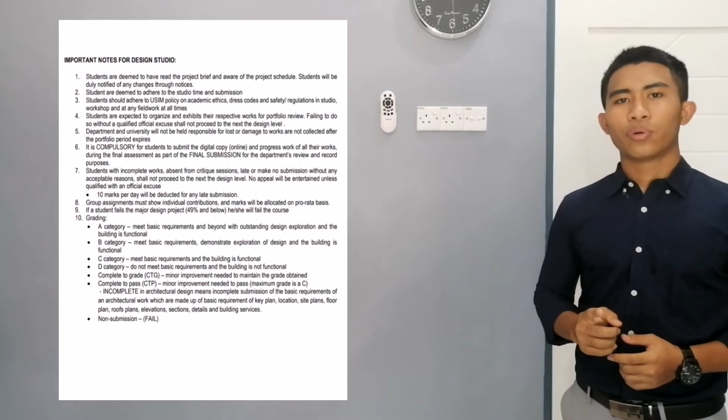First, we must do the studio pod at a 1 to 1 scale only. Second, it must be about 1.8 meter height, 2.1 meter length, and 1.5 meter wide. Third, we can use any material suitable for our studio pod.

This is my studio pod, and I want to explain about it. First, I want to explain the issue. The first issue is students don't want any disturbance during their study, which means they need privacy. Second, students want a multi-functional space for their study, which means they need comfort. Third, students need space for their belongings, which means they need safety.

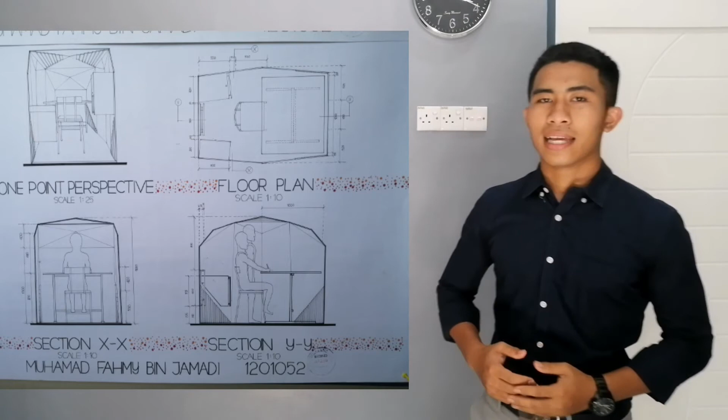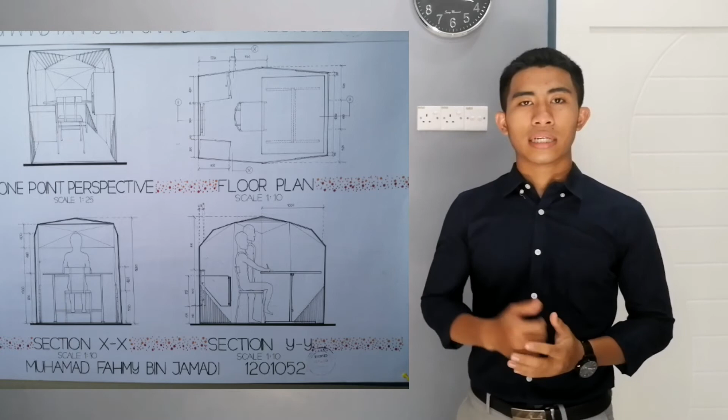My studio pod is special because I have created the adjustable drafting table, as I want the student to get a perfect, comfortable experience during their drafting study. Then I have created the chair that is very suitable for the drafting table.

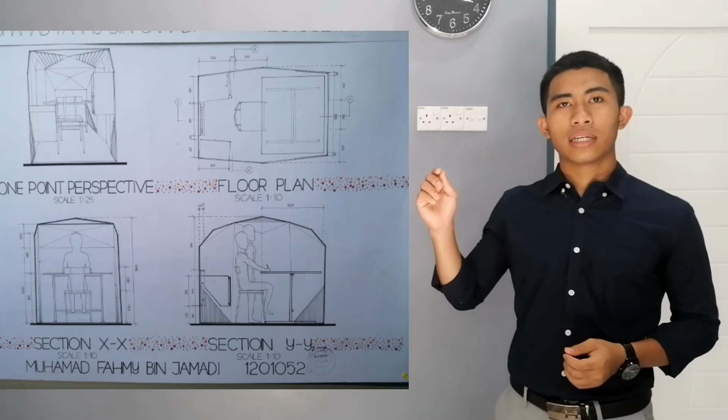Then I have one storage or cabinet for the safety of the student's belongings. The student can save their bags and wallet in the cabinet.

Then the next part is I have created a critique table on the left of the studio pod. This critique table has a foldable table, small, about 15 cm length and 14 cm wide. This critique table is for the student to put the model, the mock-up, or the sketch on the table, so he can communicate with the lecturer outside the studio pod and have a critique session.

So the student will have a comfortable place for the critique session.

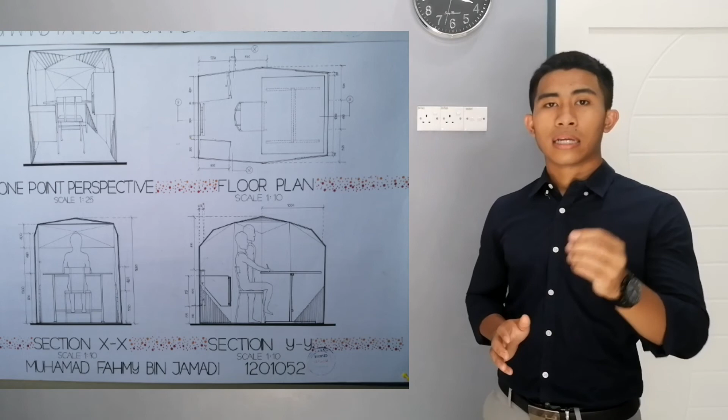Behind the critique table, I have made a secret cabinet which they can open to place their belongings in that box. Then as you can see at the back of the studio pod,

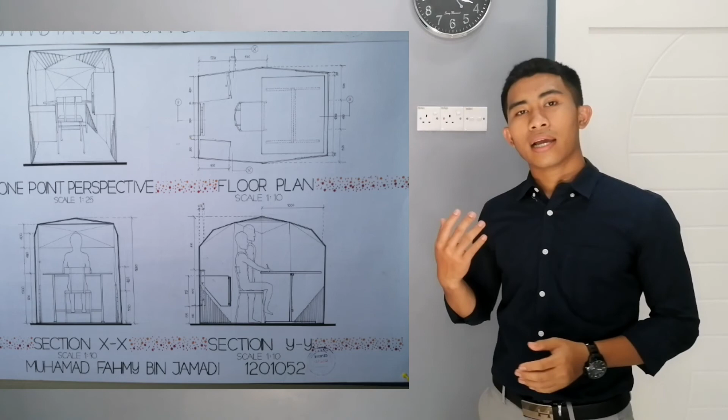I have a foldable beach bench. The beach bench is very low, and I created this bench because I want students to take a nap or rest if they feel tired or sleepy.

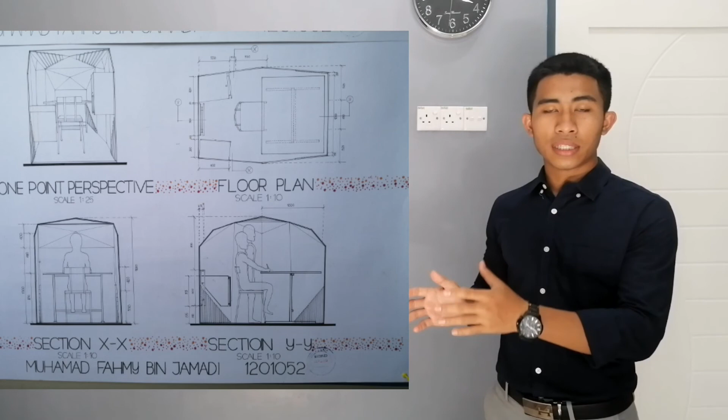To open this bench, we must move the drafting chair and drafting table aside, then we can open the bench and the student can get their rest.

And while the bench is open, the drafting table must also be folded up, because I made this studio pod to create a big space for the student to take a rest.

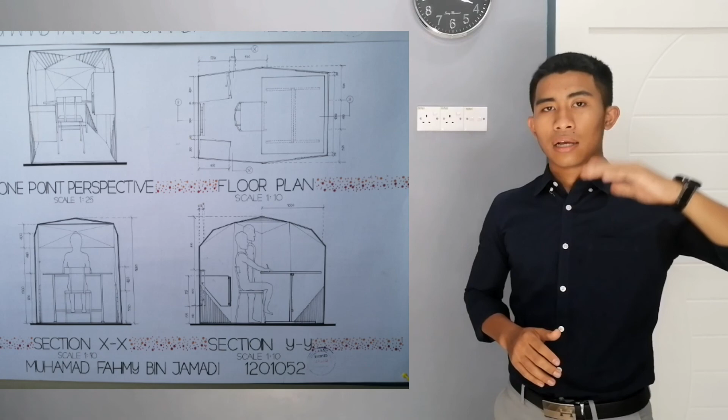Then as you can see, near the bench there's a window area, but the shape is dark. I made that space dark because when the student needs rest, they need a dark place with no light, so the student can get enough rest, perfectly.